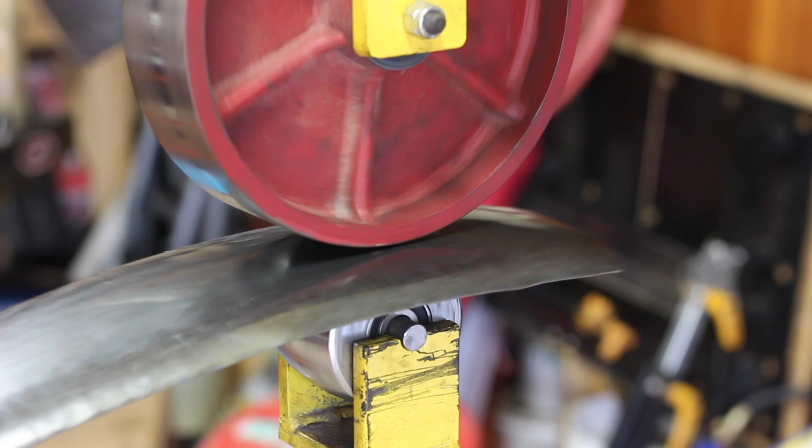This is episode 3 of the quarantine bobber build. At this point, this one took me a little while. Headlight bracket was not a big deal. You're gonna find out, basically I wanted to put an LED that got rid of the lollipop turn signals. And the big part of changing that out, I tried to put an LED in the factory bucket and it didn't work. So I bought like a universal bobber headlight bucket, which is single post.

Made a bracket to make that work on the triple trees out of some aluminum. That process wasn't real difficult. It's just taking some measurements and, you know, checking things over and over and over, drawing it up in CAD, throwing it in SheetCam, creating my cut files and cutting them on the CNC. The thing that really gave me fits,

the electronics enclosure. I had an idea of what I wanted, but actually trying to transition what I was thinking into what I wanted was pretty difficult. I tried to source a piece of tubing the size I needed and the gauge I needed and couldn't find it. So I actually came up with the idea, why don't I just cut some metal up and then make the tube myself. You're gonna find out the first tube I made actually was too narrow, and I wanted it a little wider so that it came out to the edge of the frame rails. This episode gets all the way up through the point where that gets mounted.

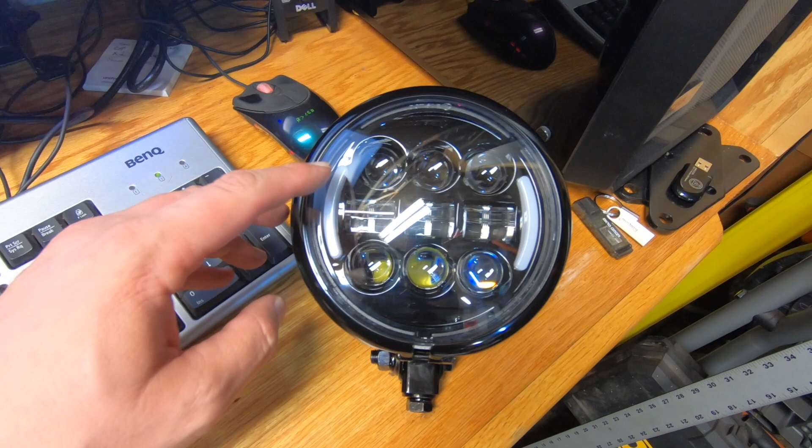All right, so the first thing I'm gonna do this week, I was gonna start on the electronics enclosure, but I decided, I got a new headlight in. I'm not going to use the factory headlight. I actually ended up with one of these LED lights, and I had to buy a new housing for it. So the way this headlight setup works is these two over here are actually white normally when it's in a regular run mode. But when you hit the turn signals, they actually turn amber and will flash with a turn signal on either side. So I had to end up buying a new bucket that has a single post on the bottom.

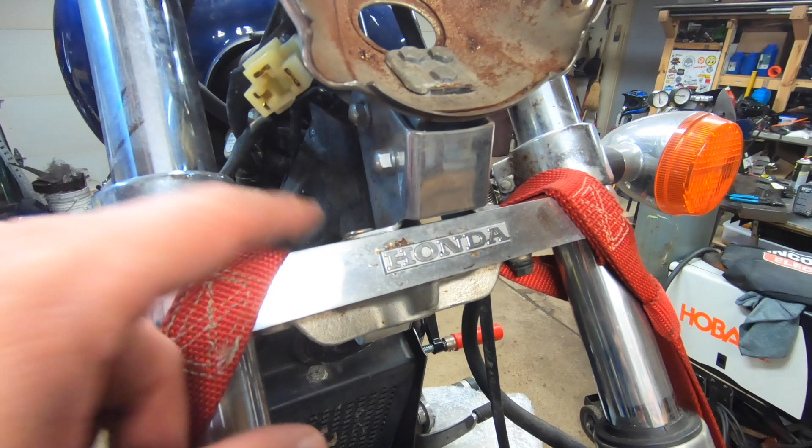And what I'm gonna do is I'm going to remove this factory mount and then build a little piece that's going to basically stick up off here, and then the nut will stick right down in the middle. So that being said, I'm gonna go ahead and get some measurements. I'll jump in Fusion 360, I'm gonna draw it all out, and then I'll jump over to the plasma table and cut the piece out.

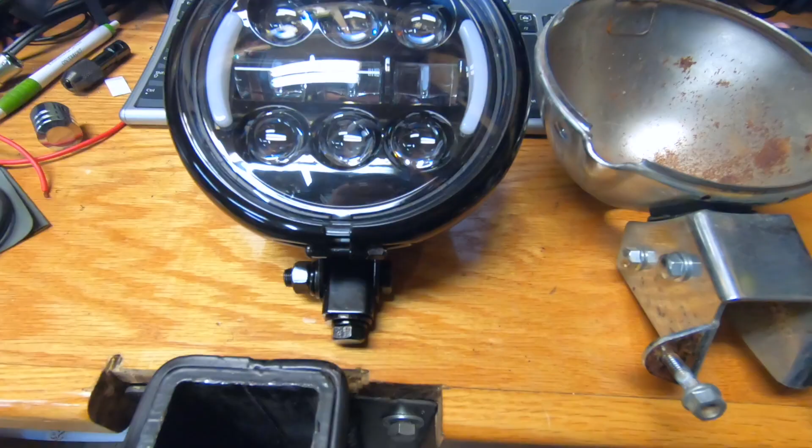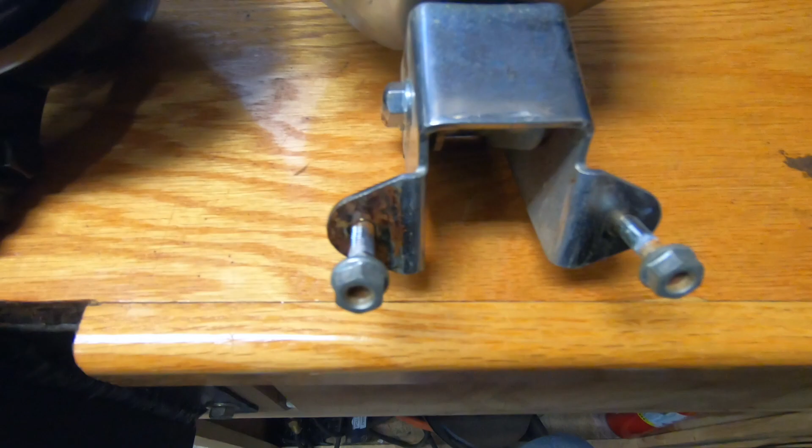So you can see here, this is the factory light. It obviously has this bracket. There's 2 holes in the triple tree this mounts to, so what I'm gonna do is create a bracket that lines up with these 2 holes that the single bolt will be able to mount to, over here in my friend Fusion 360. All right, went in here in Fusion, I drew up what I was looking for in the headlight bracket.

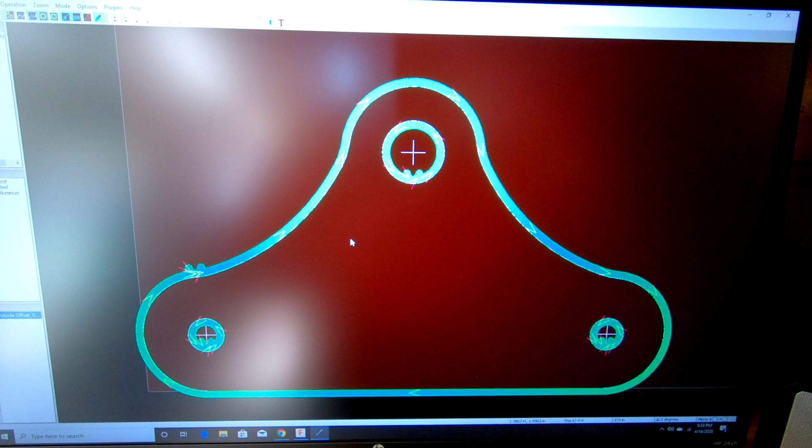So basically this will mount to the triple tree, and then the new light will mount right up here. Took it over to SheetCam and created a plasma profile. Now I'm going to save this over to a USB and then take it over to the cutter and cut it. All right, I got this bracket cut, but I'm not liking this.

I know you'll probably never see it, but you can see that the bracket I made is rounded. The bottom side of this post is actually squared at the top with a real small radius. So what I'm going to try to do is go in, edit the drawing, and add this squared-off radius look to that piece, just to make it look a little more factory.

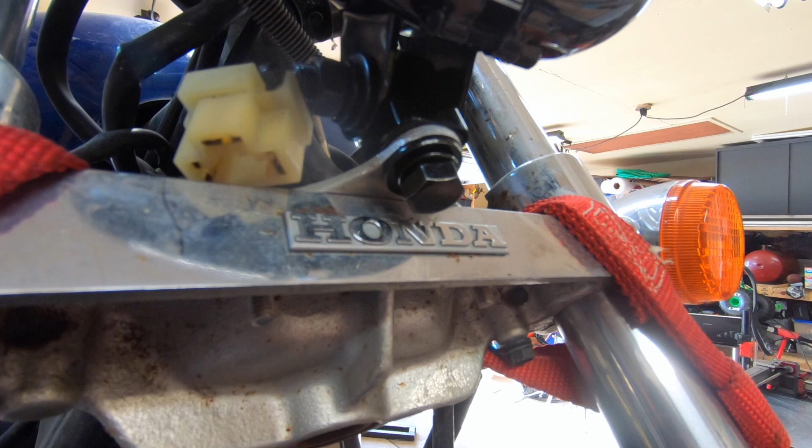All right, now you can see this is the squared part I was talking about. These match the radius of that bracket. So I'm going to export this over to SheetCam, and then we're going to go over and cut it.

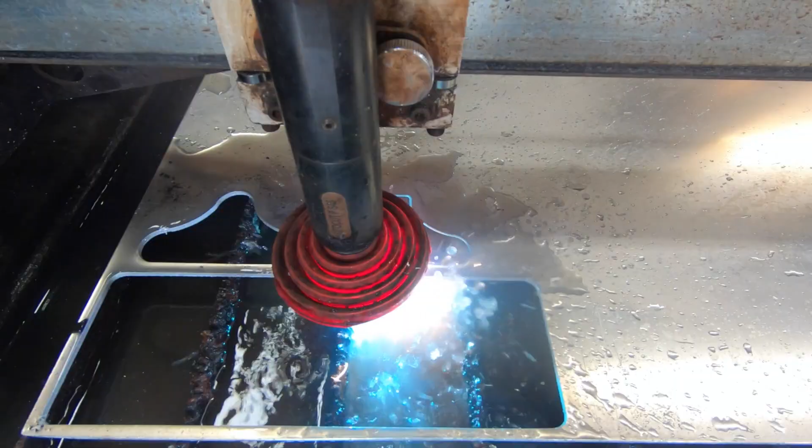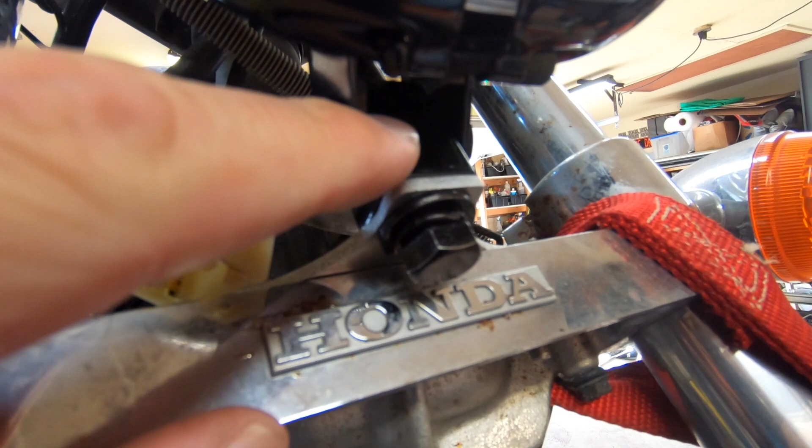You can see here now, these two line up perfectly, which I know looks kind of funky right now because this is just raw aluminum, but this will all be powder coated when I powder coat the whole front end, so it'll blend in really well. And I just wanted them to match up. I didn't want a round bracket with a square base on this old style headlight. So there we go.

All right, headlight's all done. Now you can see that it was mounted. I think it turned out really well. I need to move a couple wires around, but other than that, powder coat the whole triple tree whatever color I'm gonna do, and then it's ready to go.

So on the electronics enclosure, I basically took some sheet metal and rolled it. The first time I didn't cut the slit out of it. Then I realized I could actually cut the metal and cut the circle out of it that I wanted for the wires to run down through. And then I'm just gonna put a piece of rubber around the inside of that so the wires don't wear through it. But most of it was all cut on my CNC.

I did keep the patterns. I'm actually contemplating selling two of these products, throwing them on my website and seeing how they work. The headlight adapter, as well as a weld-together kit for this. Everything would be cut. Most people have welders in their garage, and you would be able to weld this stuff

together yourself. You just don't have the tools to necessarily CNC cut to make sure everything is perfect every single time, get a perfect radius around everything, to get the shape of the circle in the electronics enclosure. That would come to you unwelded, and then you would just have to hold it together, put some clamps on it, weld it. It's just something I'm kicking around. We'll see what happens.

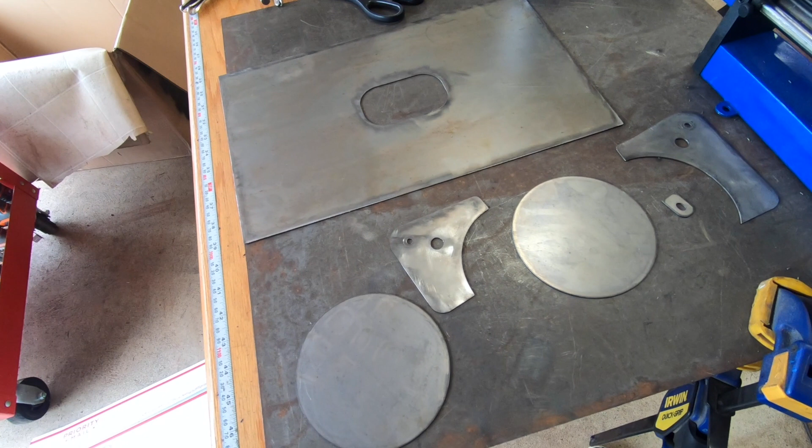All right, now it's time to work on the electronics enclosure that's going to go underneath the seat. Some of this stuff may look very strange. I've actually been working for a few days to try to tweak some of these measurements. But basically, these are all of the flat pieces I believe I'm going to need to create this enclosure. So just to test it, I had made this yesterday, a 5-inch round tube.

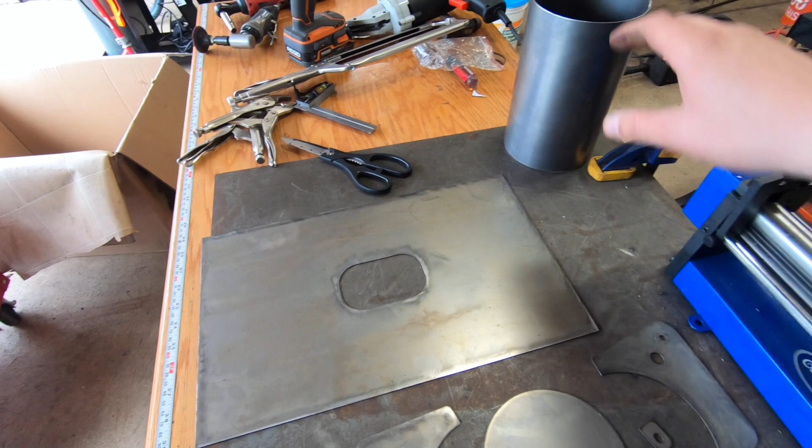The problem is it's not long enough. I want it a little longer, so it's a little wider as it's sitting in the bike. But these are the pieces that I'm going to need to create that. So at this point, I'm going to start rolling this out and then get it tacked together like this one is for a 5-inch tube, and then we'll start fitting all the rest of this stuff up, and you'll see how it comes together.

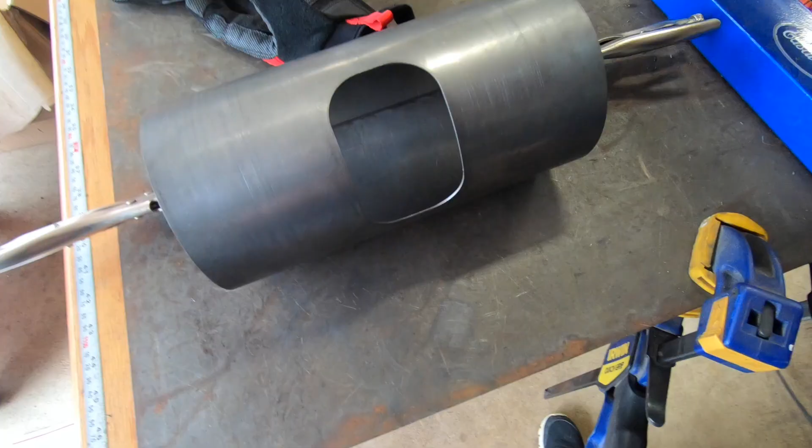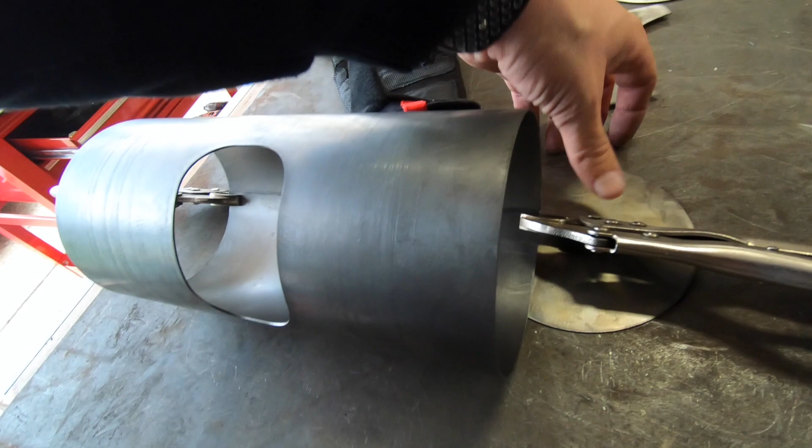Alright, so got it held down with some clamps over here on the inside. You can see, just checking, and it looks like we're right on the money there. And I grabbed one of my 5-inch discs just a second ago, you can't see it, to cover the end caps, and that looks good.

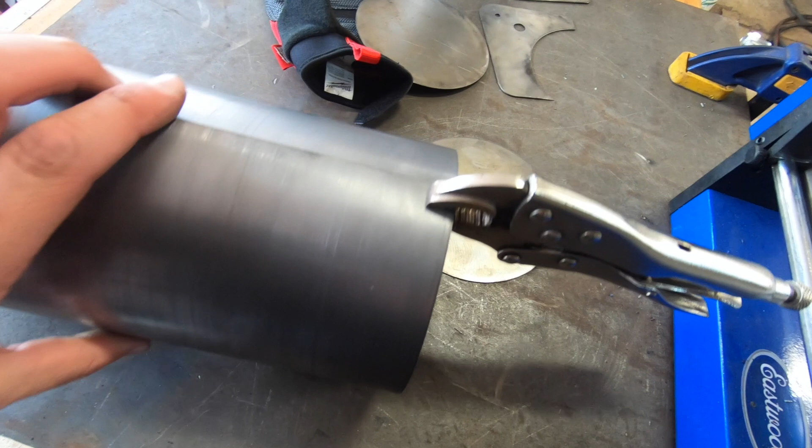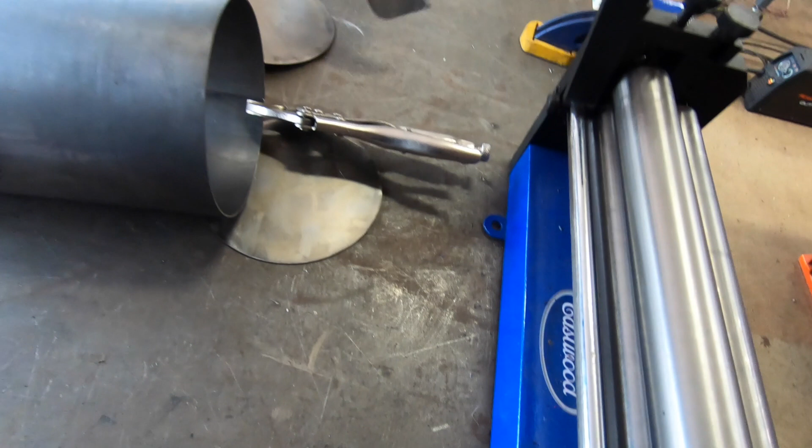So I think at this point I'm going to grab the MIG welder. I'm going to put a couple tacks on this here and here, and get the long welding clamp and put one here in the middle just to kind of hold the whole thing together. And then I'll figure out the side pieces, probably like somewhere in there. And then I'll have to figure that out. I'll have to set it up on the bike and see. And then obviously this is the hole where all the wiring is going to come down into it. So here we go, we're getting closer.

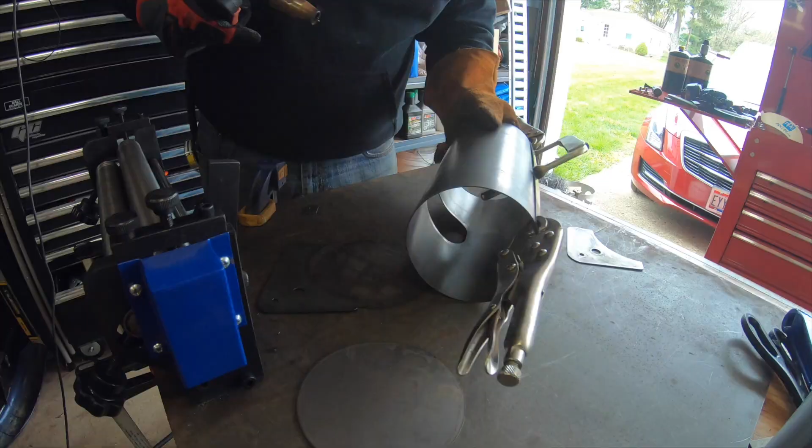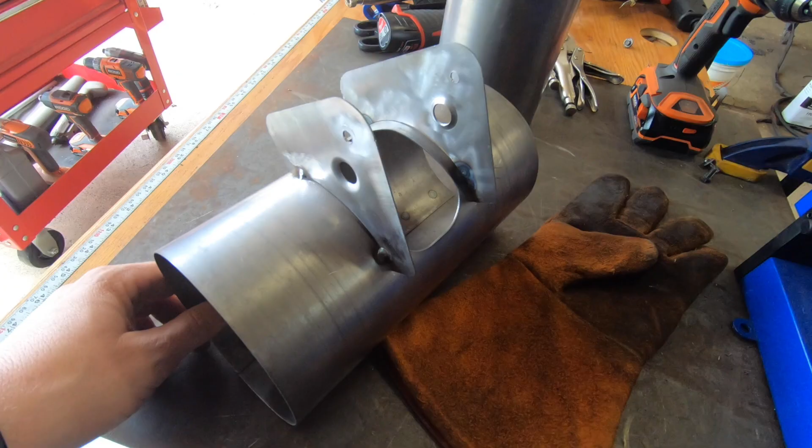This was way too much back and forth, so I actually ended up not filming most of this, like trying to mock this up. But basically what I did was I mounted these 2 brackets, the 2 top brackets here, on the frame, figured out where I wanted the tube to be, and then set them up and kind of taped everything in place just so I could keep my measurements the same.

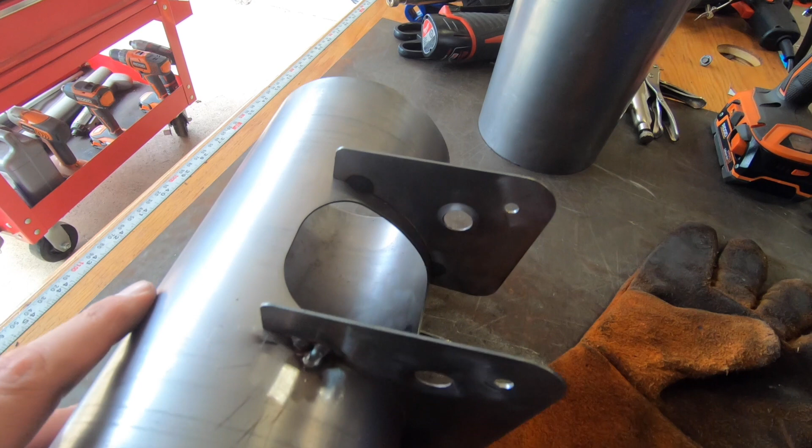I also wanted, you can see there, that hole that goes through, those are actually dimple dyed, just to give it a little strength and a little style, because there are some holes in the frame right next to this. So I figured, if nothing else, it just gives it a little flair.

Obviously, you can see here, that was the flat slot that was in that original piece of sheet metal. So now it's covered by these brackets, so you don't see it, and then all the electrical wires can run down in there. And then I cut another little bracket down here that goes into that bracket right in the middle of the frame. So basically this piece will be 100% bolt on.

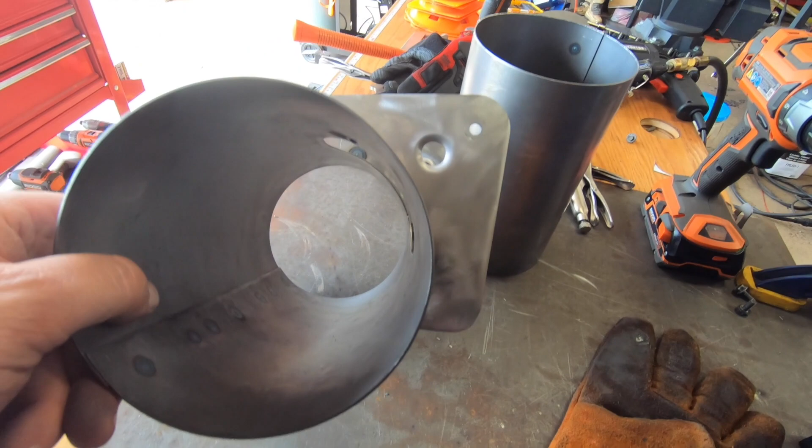There's the other tube I made, which I kind of screwed up on. So there it is. Now I'm going to sit here, I'm going to weld all this together, then I'll mount it on the bike so you guys can see it.

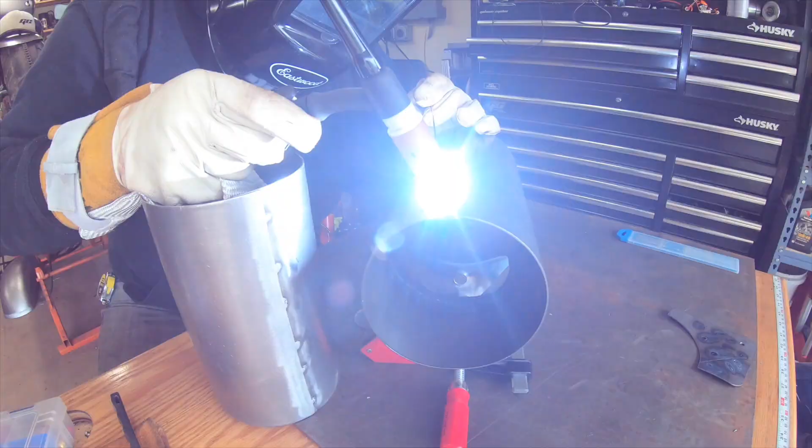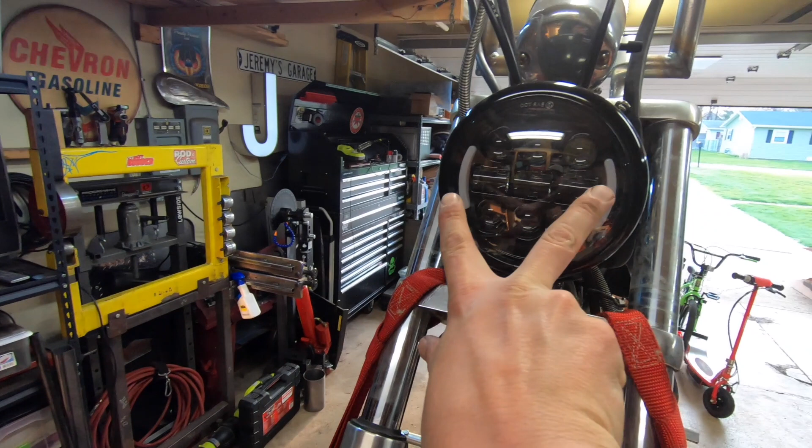I want to give you guys a quick 360 of the headlight. And what will happen is these will be white. These two things here will be white till you hit your turn signals, and then they'll turn on with your turn signals, which completely eliminates the lollipops. And then down here we have the electronics enclosure.

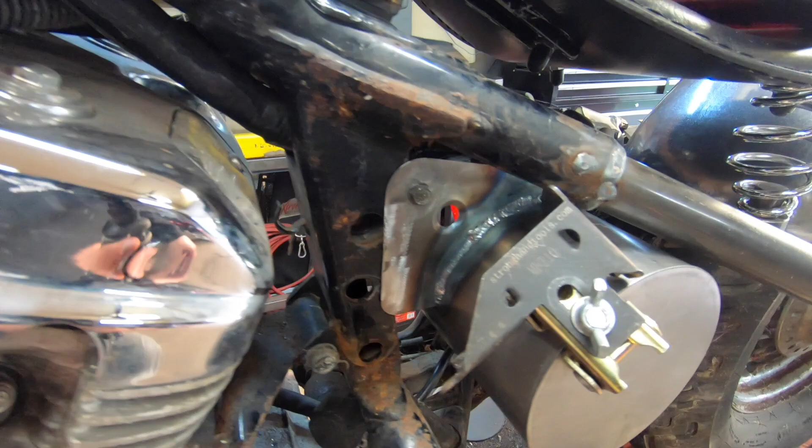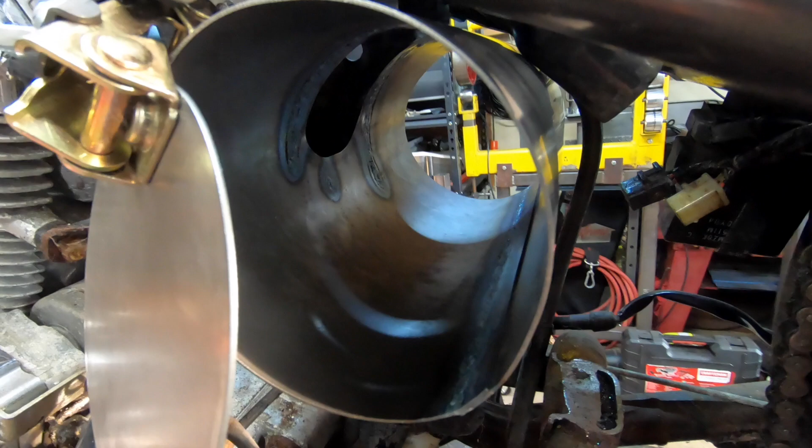You can see here, let me move this out of the way. The slot down in there for you to put your wiring. Right now I just have a magnet holding the cap on. You can see we're seam welded together, and that's where the wiring's going to come down. So I just have this Strong Hand Tools welding clamp on there for now, holding it in place, but you kind of get an idea.

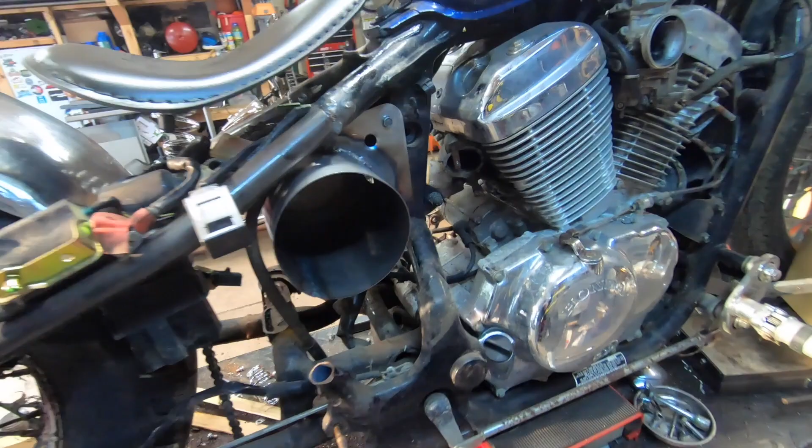And then the fender's just sitting up on here, but this is the enclosure from the other side. You can see I don't have the cap, it's sitting here. I'm not actually sure I'm going to use these yet, but we'll see. But you can see there's a lot of room down in there. So there it is. That wraps it up for episode number 3 on the quarantine bobber build.